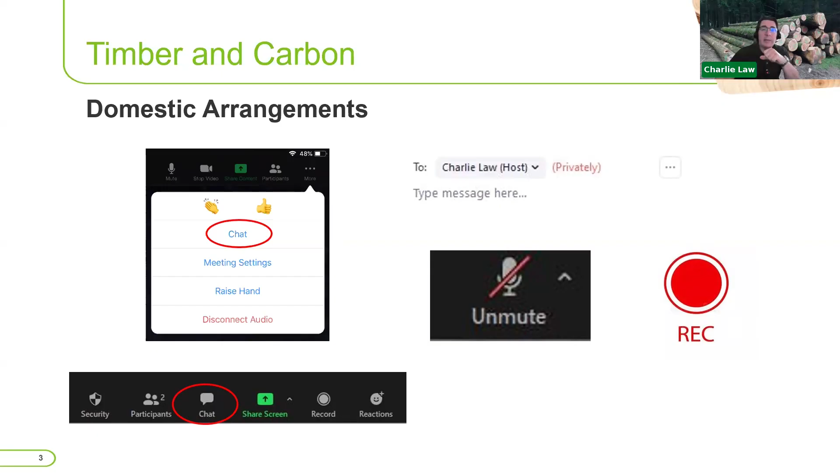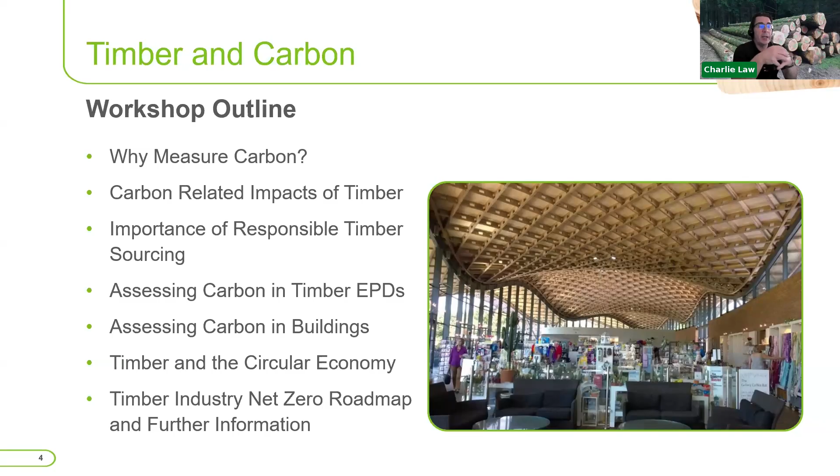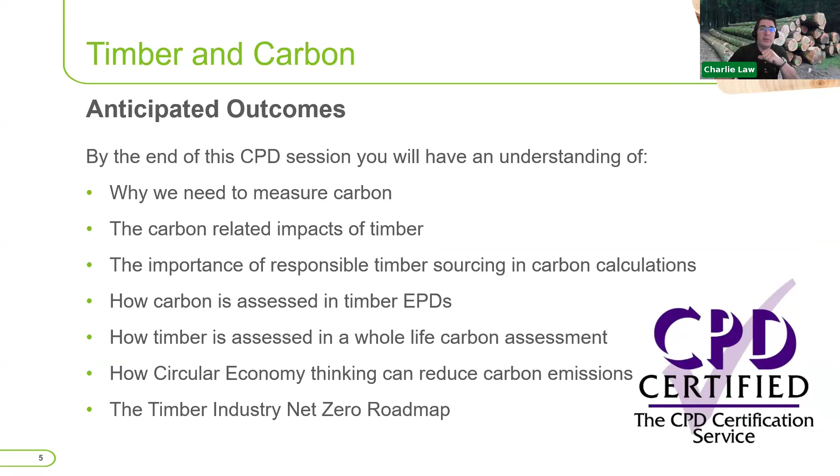Just a bit of an outline on what we're going to be doing today. So we're going to look at why measure carbon, carbon-related impacts for timber, and the importance of responsible sourcing when you're looking at carbon. We're going to be looking at EPDs and whole life building assessments, how you take account of timber within those. We'll look at how you might be able to reduce that carbon by looking at circular economy aspects, and then we'll touch at the end on some of the stuff the timber industry is doing for our net zero roadmap and other information to try and hit net zero targets by 2050. That's the outline to today, and hopefully by the end of that you'll have a much better understanding of all those points. We will be issuing you with a CPD certificate at the end.

We've got a number of targets in place. The Paris Agreement was to limit global warming to well below 2 degrees and preferably to 1.5 on pre-industrial levels, but we're probably hitting that 1.5 degrees near enough now. In the UK, we've set our own legal targets to reach net zero by 2050, set in June 2019, with an interim target to reach 81% reduction by 2035 compared to 1990 levels, announced by the government at COP29 in November 2024.

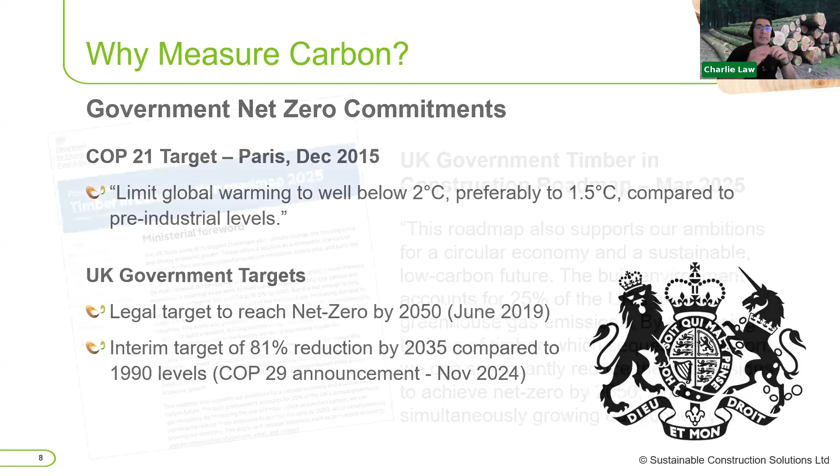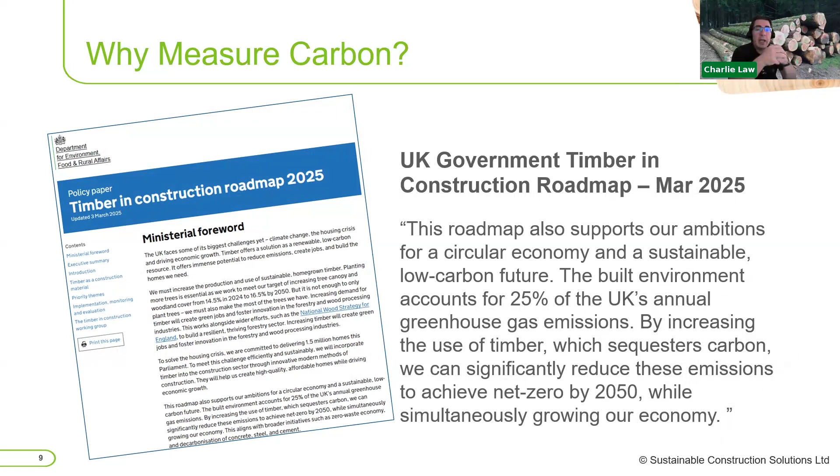Part of the reduction in carbon is also part of the UK government's timber in construction roadmap. I actually chair the working group that's looking at that, and that's looking at the built environment, which accounts for around 25% of the UK's annual greenhouse gas emissions. So by increasing the use of timber and stuff like that, which sequesters carbon, it's hoped that we can significantly reduce emissions to help achieve the 2050 targets while still stimulating economic growth. That's straight out of the roadmap, and a lot of the stuff we're covering today feeds into that net zero roadmap.

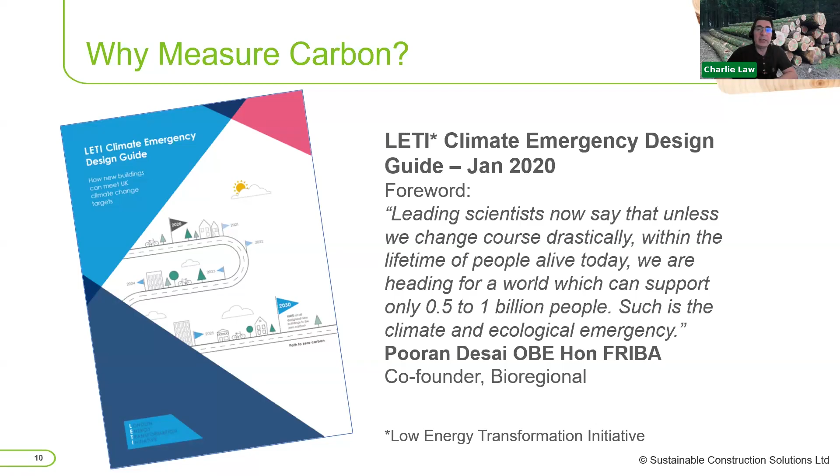But this goes back even further. You've got things like the LETI Climate Emergency Design Guide, saying that we now know that unless we change course drastically within the lifetime of people alive today, we are heading for a world which can support only half to a billion people. Now we're obviously a lot more than that, probably near 8 billion people now, so we really need to be doing something. This is a climate emergency that we need to look at. And there's a lot of stuff around government as well, the Government Climate Change Committee, which advises governments on its carbon plans.

That also states that we should be developing plans to rapidly scale up levels of wood used in construction and support the assessment and benchmarking of whole life carbon in buildings. And that's key where we're coming from today.

That ties in with what we're looking at with Part Z, which is an industry initiative proposed to the government to say, look, we really want you to start measuring the whole life carbon in buildings, because we feel that is one way we can help reach your net zero targets. So Part Z isn't law or legislation at the moment, it's purely a proposal by industry, but it's getting a lot of traction.

Again, that's one of the proposals in the net zero road. The timber in construction roadmap is to consult on that, supposedly by the end of last year, and that hasn't happened yet, which is a shame.

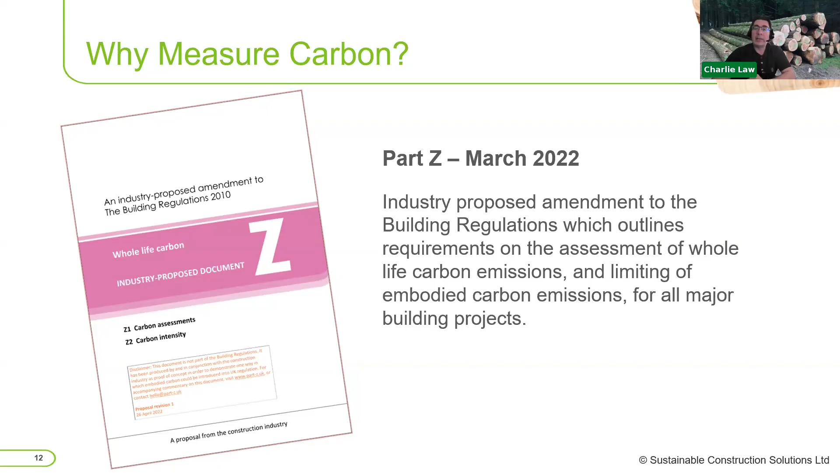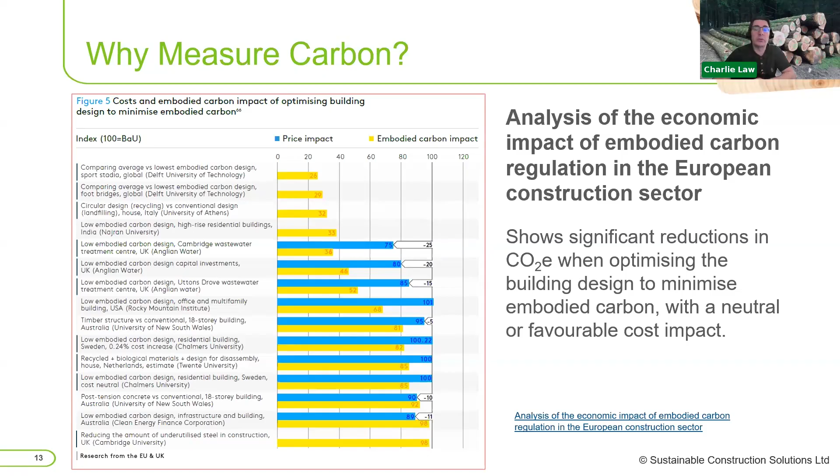So the blue line there is the cost. You can see that some of those had significantly lower costs than a standard building at the same time, if not cost neutral. None on this list were actually above that cost.

So, timber and carbon. Just going back to your old biology lessons, timber, trees sequester and absorb CO2 out of the atmosphere. They emit the oxygen element and store the carbon element as the timber in the timber fibers. So that's what makes up a lot of your timber.

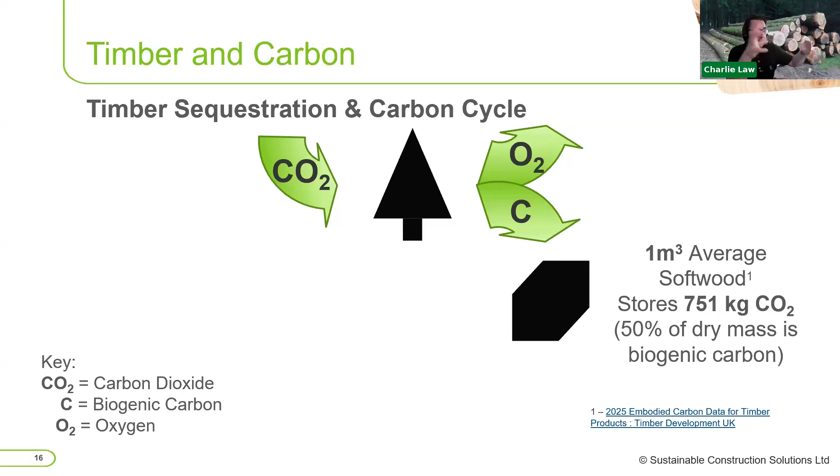50% of the dry mass of a piece of softwood is biogenic carbon, so actually half the mass of the timber is biogenic carbon. So 1 cubic meter of softwood - this is the weighted average across all the timber in the UK - stores on average around 751 kilograms of CO2. And that CO2 stays locked in that product forever until it either decomposes or is burnt.

The only time the CO2 releases is if it decomposes or is burnt as biomass. Even when you're recycling that timber, say you recycle a piece of timber into chipboard, the carbon still remains locked within those fibers within the chipboard.

So that carbon can stay stored in that timber element if we recycle it and reuse those elements forever, unless we burn it. That's why we need to start looking at maybe reducing how much of that timber we burn. And even where we do burn it, a lot of the work going on at the moment around biogenic carbon capture and storage, CCS, or carbon capture, storage and use, is trying to see how we can capture a lot of that carbon out of the atmosphere.

So by the time the timber going into buildings now is maybe coming out and getting burnt, I'd be very hopeful that actually that CO2 doesn't end up in the atmosphere. It stays locked away somewhere, whether that's in a number of different ways that they're looking at at the moment.

Just going back to that timber and construction roadmap, one of the things the UK government is looking to do is increase planting to try and sequester more of that carbon out of the atmosphere within the UK.

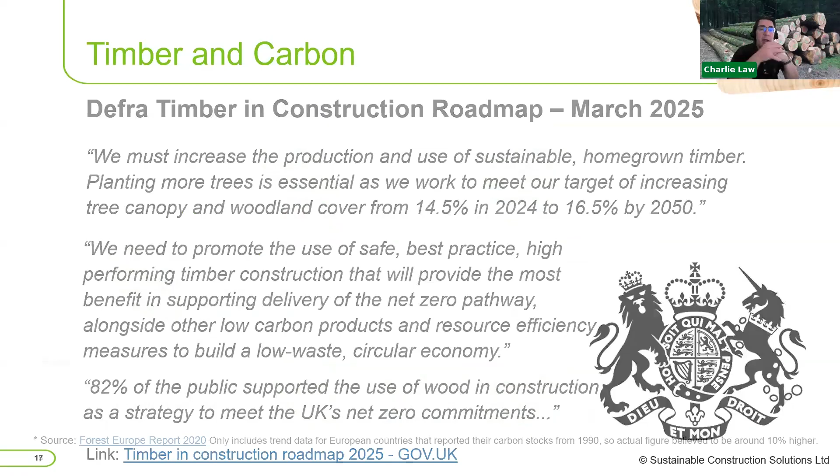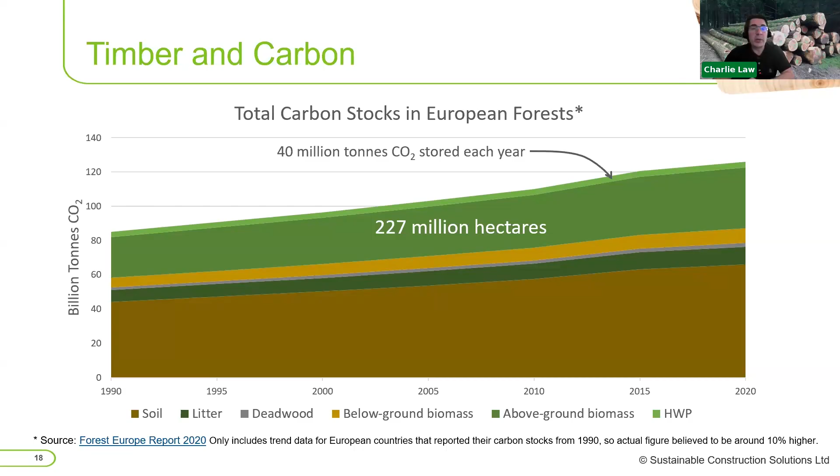For the UK, slightly different figures - there's still a lot stored. Obviously we've got a lot less forest cover in the UK, we're maybe down to 13%, whereas the European average is over 30, 37%.

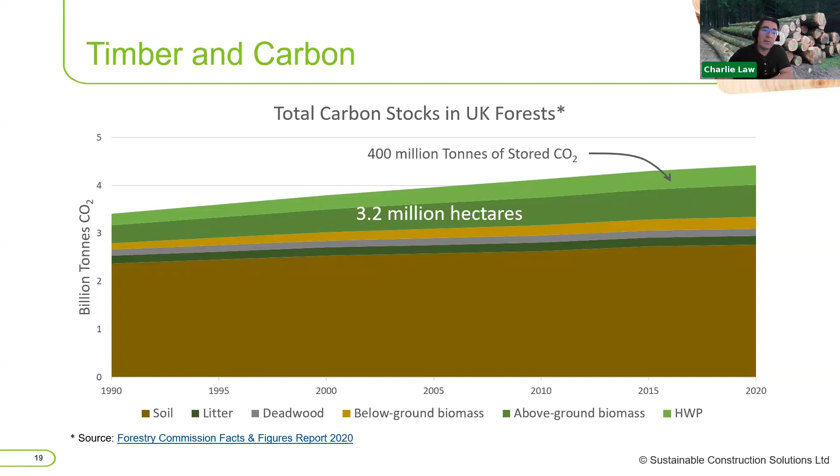But we're still storing sort of 4.5 billion tons of CO2 in our small amount of forest here in the UK. And because we're still using quite a bit of timber, we're storing quite a bit of that in harvested wood products. That light green line at the top is quite thick in the UK because we still use a lot of timber buildings. We estimate it's probably over 400 million tons of CO2 stored in timber buildings at the moment, according to the Forestry Commission.

So just how do we assess that? How do we measure that carbon? How do we know it's there? Well, there's a few, obviously lots of scientific studies have gone over the years, and these have been put into a number of standards.

Two key ones are BS EN 15804 and 15978, which measure carbon in buildings and carbon in products. You've also got ISO 14025, which is the international standard. The EN standard is a European standard, and the 15978 is interpreted in the UK by the RICS whole life carbon assessment for the built environment. So when you're measuring carbon in a building, we should be looking at that RICS product. If you're measuring carbon in a product, you're more likely to be looking in Europe at that EN 15804. And there are obviously other documents behind that relating to timber and how we measure certain elements.

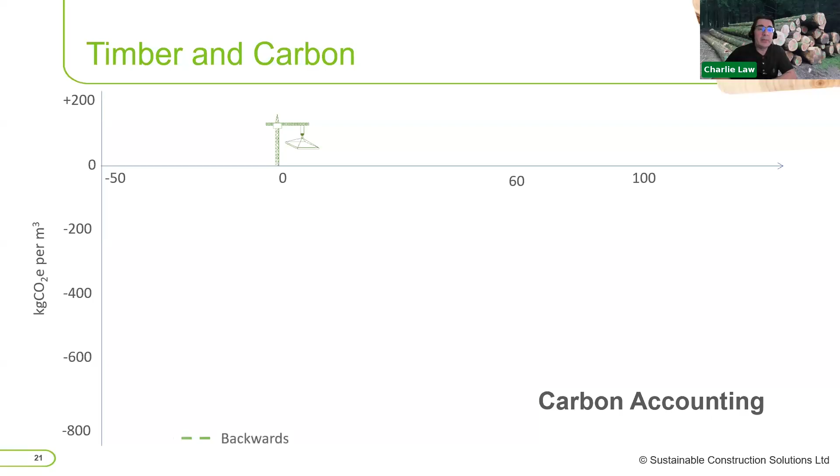Now, the way carbon is accounted for, both in products but particularly in buildings - if we look at a building example here, the way the tree, the timber works: the tree grows, and a typical piece of softwood coming from Europe or the UK might on average be around 50 years old. So if we go back 50 years, that tree has been sequestering carbon out of the atmosphere over that 50-year period. By the time it's felled and used in a building - we say year zero there - it has sequestered 750 kilograms of CO2.

Now, there's obviously an upfront impact where we're processing the timber, harvesting it, transporting it to the sawmill, etc. So there's a figure that reduces that amount, probably around 50 kilograms of CO2 in that upfront impact. So the remainder - you're looking at around 700 kilograms of carbon still stored in that piece of timber for the duration of its use.

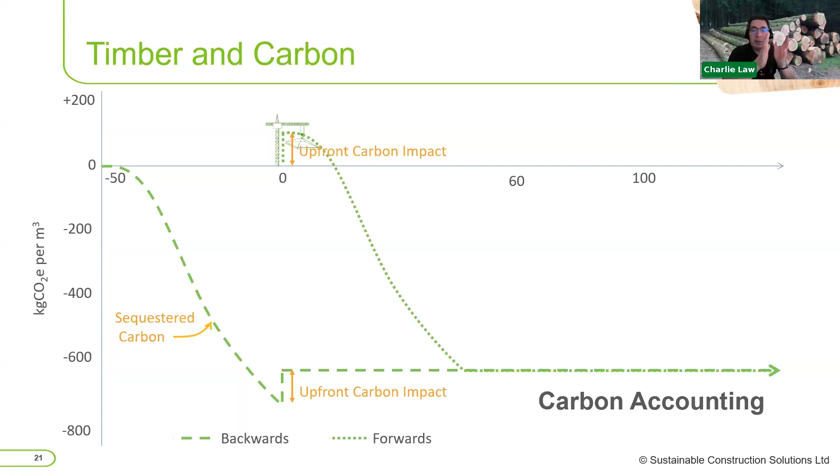And the standards generally, there's a couple of ways of looking at it. There's an alternative view where we should take that carbon at year zero and discount it over the life of the building, say about 50 years. I can understand why some people say that, because we need to try and make sure the building stays up for as long as possible. But in pure accounting terms, there is this missing carbon gap, because the carbon has been taken out of the atmosphere, but if you're not accounting for it for 50 years, there's a gap in that carbon accounting. So the standards don't look at it that way.

The standards very much look at it in the backwards-looking approach, where they take that carbon at year zero, allowing for the upfront impact. But what they do is set a limit of 60 years. After that 60 years, you need to account for the timber coming out of the building and the impacts of that. Because you've accounted for the sequestered carbon upfront, you need to add that back in at end of life. So that's why you end up adding back in that 750 kilograms of carbon, plus a little bit more for transporting off-site, demolition, processing, etc.

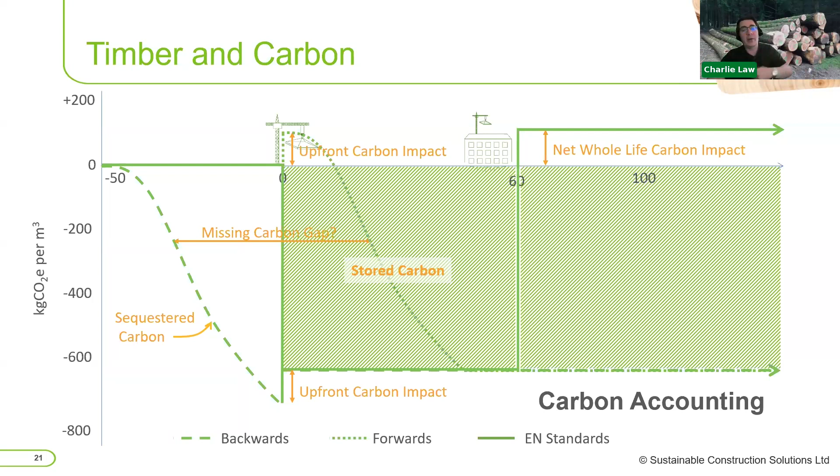But during that time, you've got that stored carbon. If we do keep that in the building - the standards have set it at 60 years - but if you can keep that timber in the building for 100, 120, 150, 200 years... there's a door in Westminster Abbey that's 1,000 years old. If we can keep that in there, that's locking that carbon up forever. So that's just how the standards approach it. One of the key things in the standards is it talks about responsible sourcing of timber.

In EN 15804, the definition of sustainably managed forest is key. It says sustainably managed and certified forests are any forests operating under an established certification scheme for sustainable forest management. Examples would include FSC, PEFC, and UKWAS, which is the UK Woodland Assurance Standard, and Grown in Britain as well. That gets picked up within that sustainably managed forest definition.

You can also include non-native forests or short-term managed forests, so things like the UK Forestry Standard would pick that up, along with some other areas that don't really apply to the UK anyway. The two main ones are the top two, but the main one being, let's say, PEFC certification.

PEFC certification would allow you to take account of the sequestered carbon up front. If you don't have that guarantee that the timber has come from a sustainable source, you won't be able to include that sequestered carbon up front, but you still have to include the impact of end of life, which means that timber building would be very carbon inefficient. The reason they're asking for this is that there have been issues in the past, and still are, of deforestation in certain parts of the world.

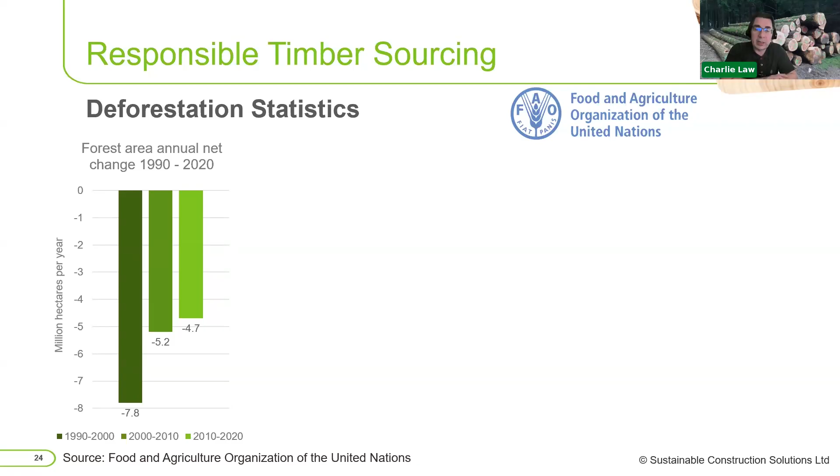These are the latest figures from the UN Food and Agriculture Organization up to 2020. Hopefully they do these every 5 years, so we should see data sometime this year going up to 2025. You can see we were really bad back in the 1990s, losing about 7.8 million hectares a year of forest. That has slowed, we're now down to 4.7 million hectares, but that's still a net forest loss. That means less carbon being taken out of the atmosphere across the globe, which isn't good, because we're emitting even more, and there's less forest and other natural resources enabling that carbon to be taken out of the atmosphere.

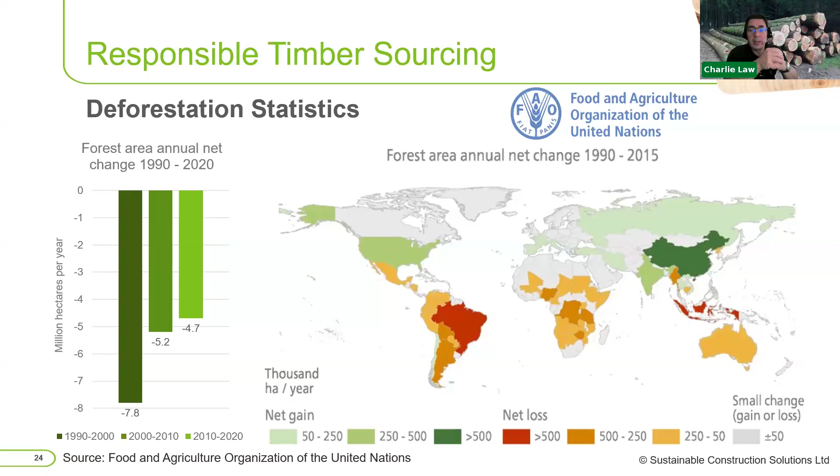So we do need to be really careful where we get our timber from, and make sure we ask questions around certification to ensure it's responsibly sourced. Brazil was losing over 500 thousand hectares, about 3.5 football pitches every minute at one point. It has slowed slightly, but we're still losing a lot, so we really need to be asking those questions.

Just to look at what we buy, these are the latest figures, the 2024 UK timber consumption. The 2025 figures won't be out until probably near September this year, so these are the latest figures we have. You can see we consumed around 15 million cubic meters of timber in the UK, a vast majority from softwood products, so that's sawn timber or particle boards, OSBs, fibre boards, and MDF. All those are made out of that softwood product.

A small amount of sawn hardwood, just under 500,000 cubic meters, and quite a bit of plywood, just over 1 million cubic meters, the majority of which is hardwood ply. Then a growing amount of engineered timber, so that's CLT, glulam, and a big proportion of that is actually I-joists, so things like engineered timber joists are a big proportion of that engineered timber.

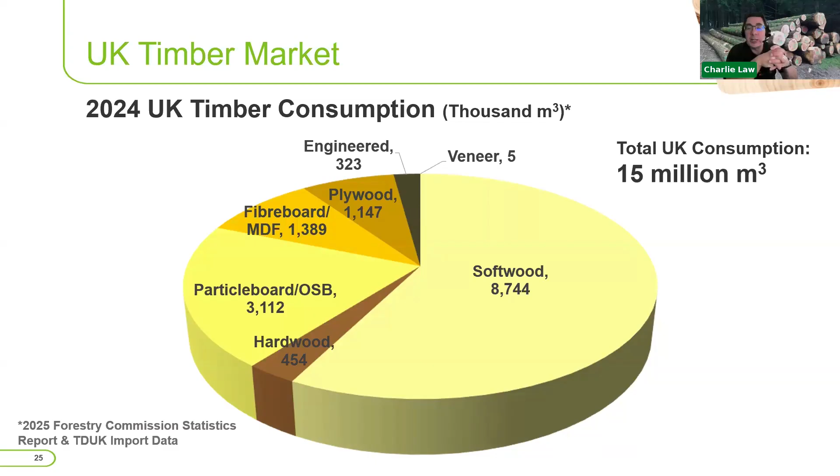Things like plywoods and stuff like that, let's say it's not always responsibly sourced. We know there are some issues with certain places, but timber generally is a fantastic resource. It's renewable, and if it's managed in the right way, it's a good resource to use.

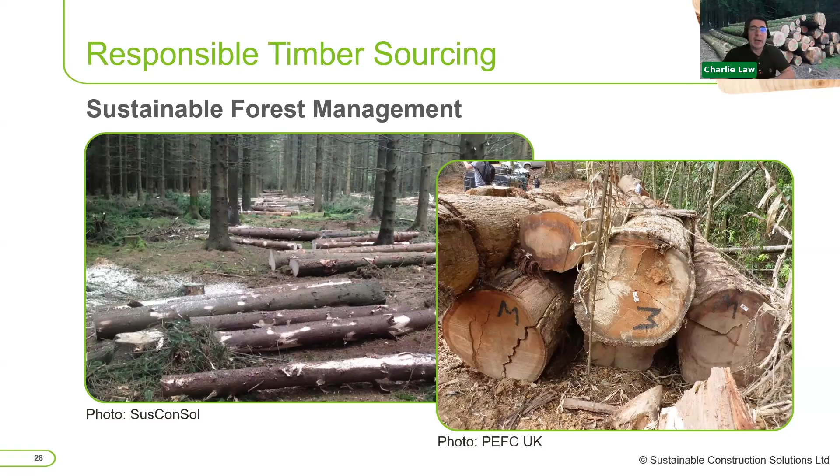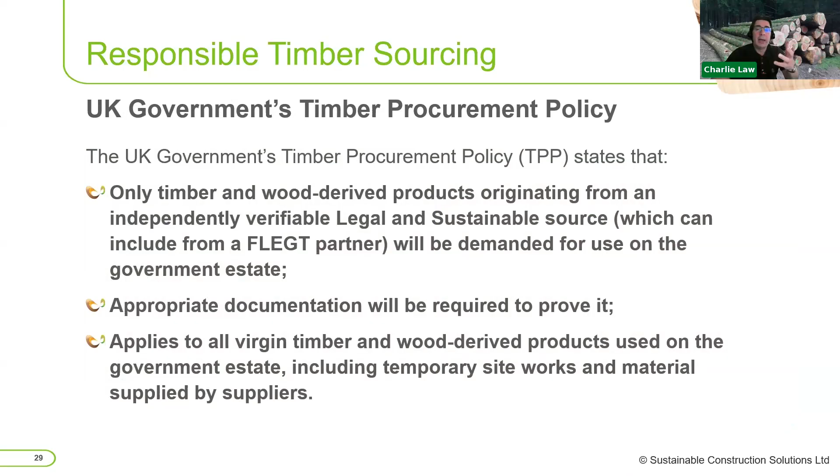So make sure we're using sustainably managed forests. These are some examples from the UK and Malaysia there, and obviously that's all picked up in the government's timber procurement policy, where they require sustainable timber and reference the three main schemes we talked about earlier on.

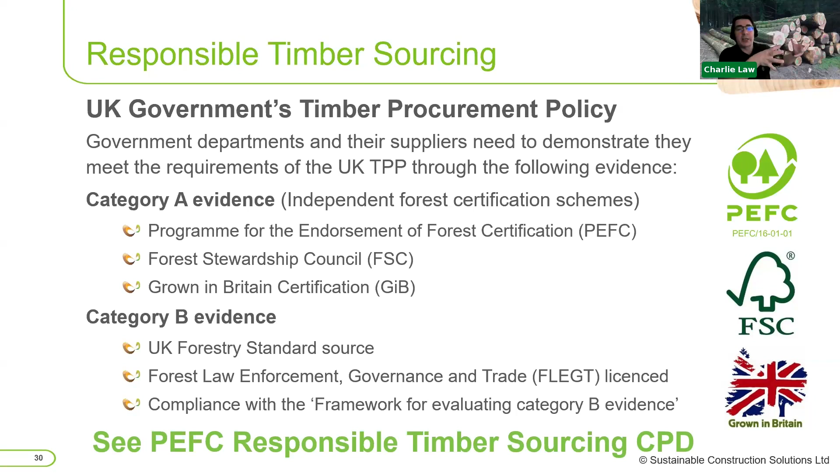PEFC, FSC, and Grown in Britain are the three certification schemes that the government recognises as being sustainably sourced. If you want more information on how that works, there's another CPD on responsible sourcing which goes into detail on chain of custody and stuff like that, so you can find more information there.

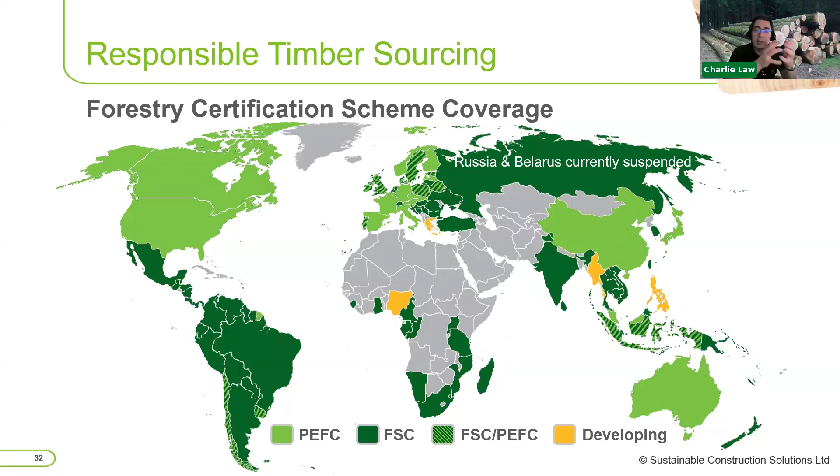When you look at where your timber is actually coming from, most of it comes from Europe, and that PEFC area is very strong there. It's only really the UK and Sweden that focus on FSC timber. So if your timber's coming from Europe, it's more likely than not to be PEFC certified. Likewise, if you're getting stuff from the US or Canada, that's also going to be PEFC. It's more the higher risk nations where FSC dominates - South America, Sub-Saharan Africa, and the Far East. So just bear that in mind.

Moving on, how do we assess that carbon? We've now made sure our timber is sustainable, so we can take that into account within our assessment methods. When we look at a timber EPD, for example, it's split into a number of sections. There's what we call the upfront stage: A1 to 3 is the product stage, and A4 and 5 are the construction stage. So this is our upfront carbon emissions in effect.

This covers raw material extraction, transporting the raw material to its production site, usually a sawmill, which is A3, the manufacturing bit. But there are bits in between - if you're remanufacturing, there'd be more transport and production involved if you're making it into an engineered product, for example. Once you've got the finished product, you're transporting that to the construction site, and there's an element of carbon emissions to put that piece into place on site. That's what we call our upfront emissions.

You've then got the use stage - is there any energy used for using the product? Timber obviously doesn't need plugging in, so there's no carbon emissions associated with that, which is more where B1 comes in. Maintenance, repair, refurbishment, and replacement come into it when doing a whole life carbon assessment. So if you use a short life product, for example an untreated softwood as cladding on the side of a building, that won't last 60 years, so you're required to show that it will have to be replaced within that 60-year cycle. That would come into your assessment in that situation.

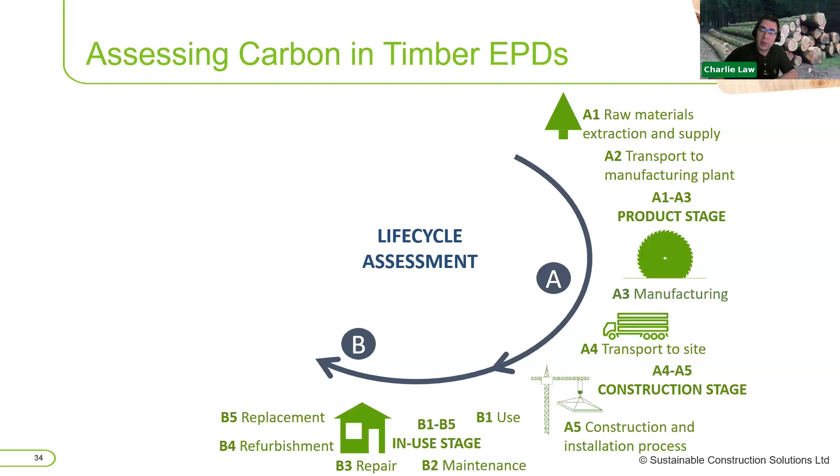Then you've got any operational energy and water used by that piece of kit, which doesn't really apply to timber, as we said. And then you've got the end of life emissions - demolition or deconstruction, transporting it off-site, and any processing. If it's a waste product, even if it's reused, it might need some processing or disposal. That disposal is very much landfill we're talking about here, because if it's burnt for energy, that comes under waste processing - it's classed as a recycled product and then goes into the energy sector as a product.

Within the EPD, you also have to take account of beyond the end of life cycle. These figures don't form part of the overall impact of the product in the EPD, but they do show how that product could be reused at end of life. For example, is there a benefit of using recycled timber in a panel board because you've got lower emissions from that versus virgin timber, since you're not felling a tree, only processing the recycled material? Or if you're burning it, you haven't had to use virgin materials or another form of fuel. So there are those sorts of benefits taken into account, but it doesn't form part of the main emissions in the EPD.

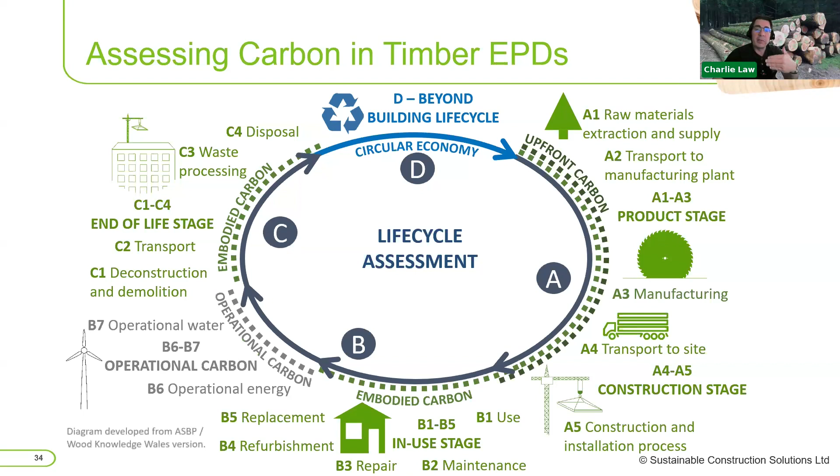As mentioned, embodied emissions are seen as A1 to 5, B1 to 5, and C1 to 4. Operational emissions are the B6 and 7. And as we mentioned, you've got the upfront emissions, which you might have heard called your A1 to 5 emissions.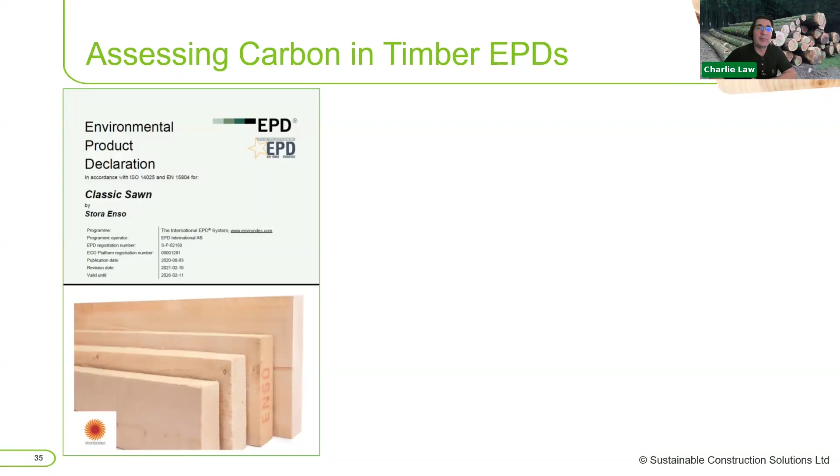So when you look at an EPD, this is a good example from Stora Enso, although they have updated it and it's not as good now, the latest one. This is the older one, but it's very clear, so that's why I still use it.

What you're seeing there is a figure somewhere that talks about the biogenic carbon stored in the product. If there's a lot of packaging, over 5% biogenic carbon in the packaging, you need to report that separately. Timber rarely has packaging over that 5%. You can see the biogenic carbon of this particular product is 733 kilograms, slightly lower than our average of 751. But underneath you can see how that's made up.

You've got the fossil, the biogenic, and the land use and land use change or transformation figure. The key figure for impact is generally your fossil carbon - that's where your highest impact is going to be. Your biogenic carbon there, you'll see that sort of 7.33 to the power of plus 2, meaning it's 733 kilograms of biogenic carbon stored in that product. That's how you read the EPD.

A lot of that's down to A1, which we talked about earlier. Your raw material extraction on average is around 12 kilograms - it's quite low. It's in that A1 section that you allow for that biogenic stored carbon. So in this example, the 733, you've then got transportation from the forest to the manufacturing plant, on average around 17 kilograms per cubic meter. Then you've got the processing in the factory, around 6 kilograms of carbon.

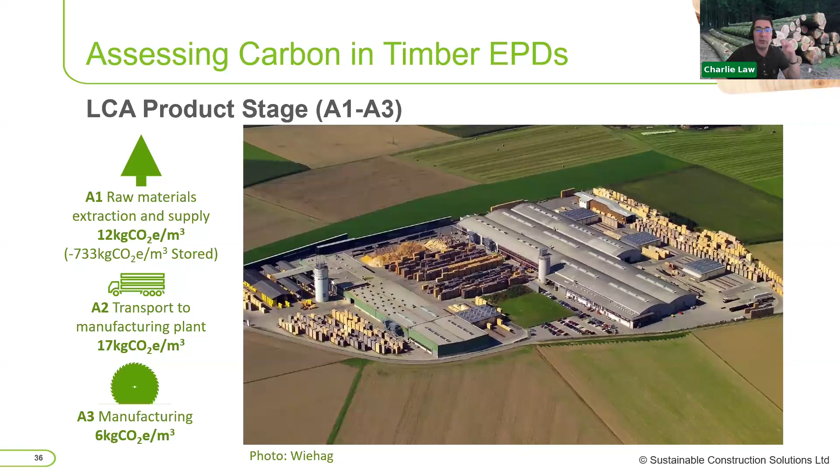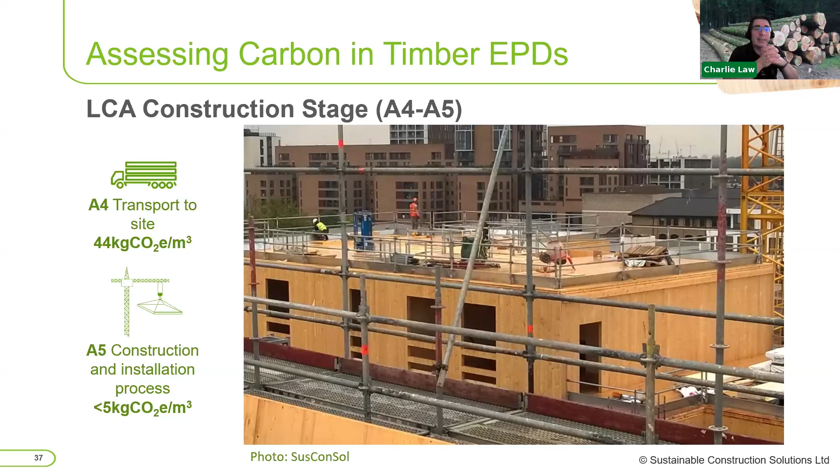You then transport to site. They're quite high emissions for some timbers, because a lot of this timber we're bringing in from Europe, for example Scandinavia, Germany, Poland, depending on the material you're talking about, so they can be quite high emissions per cubic meter of material. But on site, fairly low emissions to put that into place, generally less than 5 kilograms. It's a little bit difficult to get that data because that's coming out of the construction sites themselves.

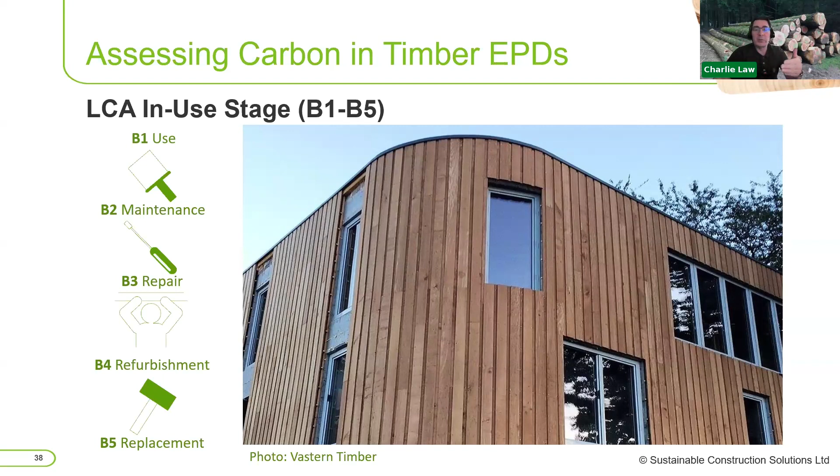As far as in-use, as long as you design the building to last that 60 years - for example, this one's got cladding, that's brimstone, that will last 60 years - you shouldn't have any in-use emissions. But again, if you don't use a product that's going to last the life of the building, you might need to take account of some of that.

End-of-life emissions are generally fairly small. So deconstruction is generally less than a kilo, less than 0.1 of a kilo in many cases. There's some transport off-site, generally less than a couple of kilos to get it to a processing facility. And then C3, you've probably got the processing emissions in there, which can be high - 6 kilograms on average, but I think that's a bit higher. In a lot of cases we're seeing that being a lot lower now.

That's where you would add back in - we talked about adding back in the sequestered carbon. That would go back in so that stored carbon can be transferred to the next product cycle. So, for example, if it's getting transferred from solid timber into chipboard, the chipboard can then take account of that 733 kilograms of carbon. That's why we do it, so it's transferred.

Ideally, in the EPD, you should see figures for reuse, recycling, biomass, and landfill. Landfill is very unlikely - you very much don't see that. A lot of EPDs, though, will take a mix, and it will be based on the country of production. So if you're looking at an EPD from Germany, the figures for C1 to C4 are unlikely to be representative of the UK, so you can't really take that into account. We are actually looking to see if we can include some C1 to C4 figures for the UK going forward.

So they should be in the latest data. We're just running that past our verifiers at the moment to make sure they're happy with that. So bear that in mind, don't use the EPD figures C1 to C4.

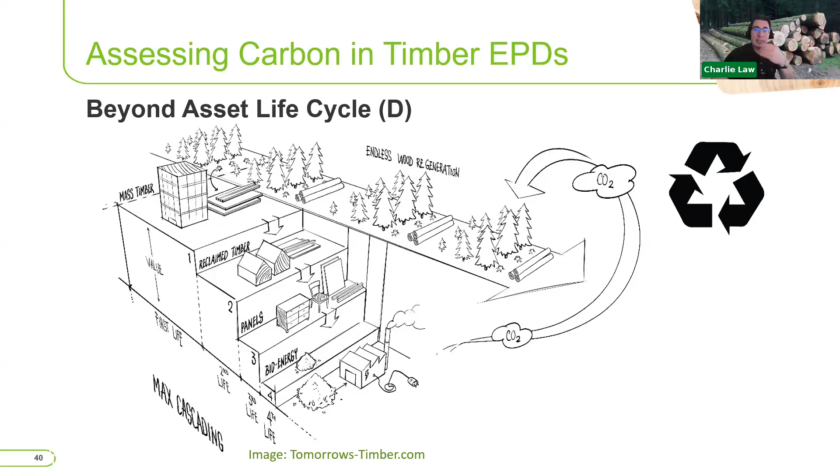And as a last resort, we should be looking at using that timber for energy production. So that should be a last resort. At the moment, unfortunately, all too often that's seen as the first line of defence, and we're burning too much timber. Probably about two thirds of the timber that goes to waste is actually going straight for energy recovery, and we need to change that over the years.

So in building, we've talked about the carbon for an EPD. In buildings, the process is exactly the same. We've got the same processes there: the upfront carbon, the A1 to A3. We just put all of those elements for all the different elements from the EPD into that whole life carbon assessment for the building, and obviously with the quantities of that particular material.

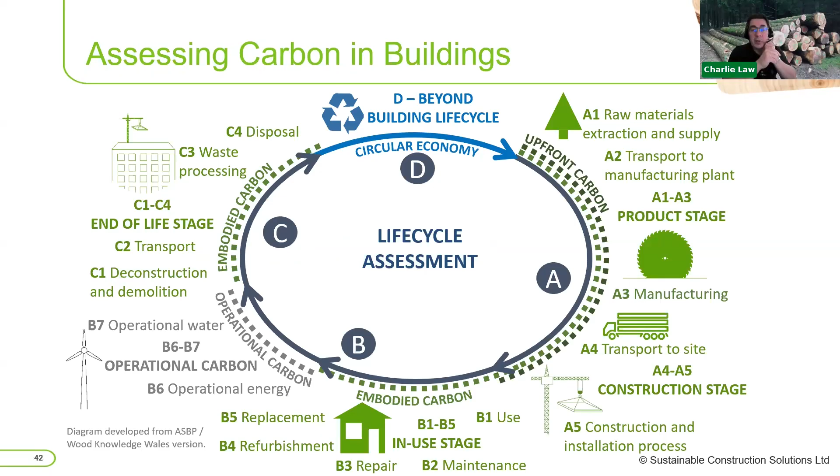When you carry out a whole life carbon assessment, so that's A1 to 5, B1 to 7, C1 to 4, and D of a building, then you can include in effect that negative figure that you'd usually get with timber in A1. So you'd be able to include that whole figure in there, which includes let's say a 751 plus the fossil carbon, so it'd be lower than 751. It'd probably be around 700 minus 700, something like that for a piece of softwood, because you're adding back in that 751 at C3, so they balance themselves out.

When you're doing an upfront assessment, you're not allowed to include that total figure, so you're not allowed to include the biogenic carbon in A1. So what you have to do is you state in effect just the figure excluding the biogenic carbon element, and I'll show you some figures for that in a minute. And then you state that biogenic stored carbon separately. Like we said, just a reminder, all timber must be from a sustainable source to be able to do that.

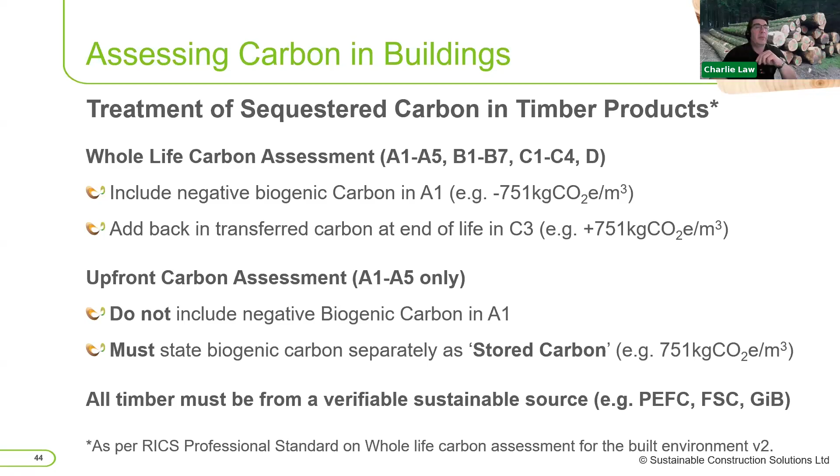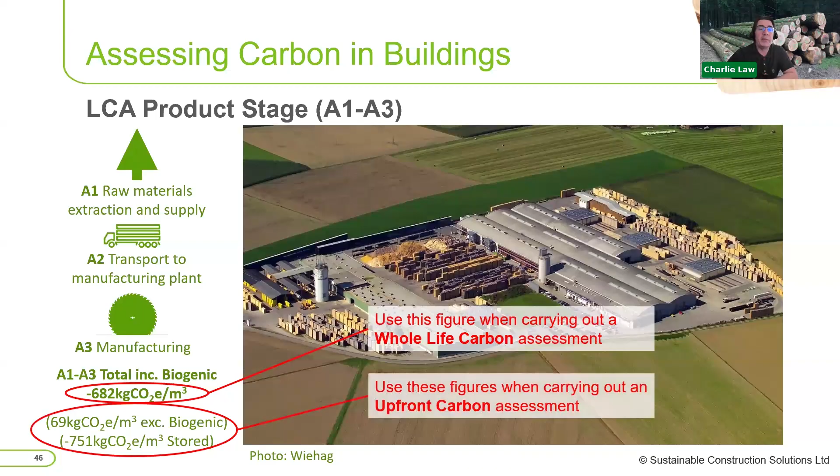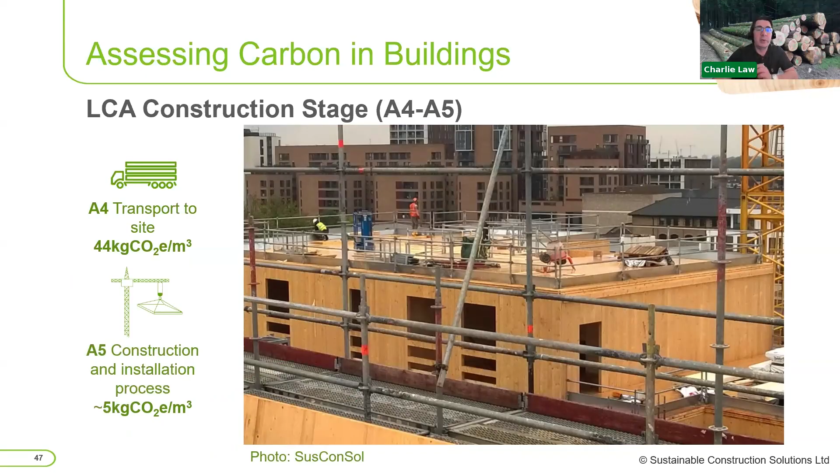Your transport to site on average is around 44, and you'd have to measure your A5 emissions, which are probably circa around 5 kilograms of CO2 per cubic meter. But that's really something you need to measure on site with your contractor.

In the use stage, as we said, you shouldn't have any impact there if you design the timber to last the 60-year life of the building.

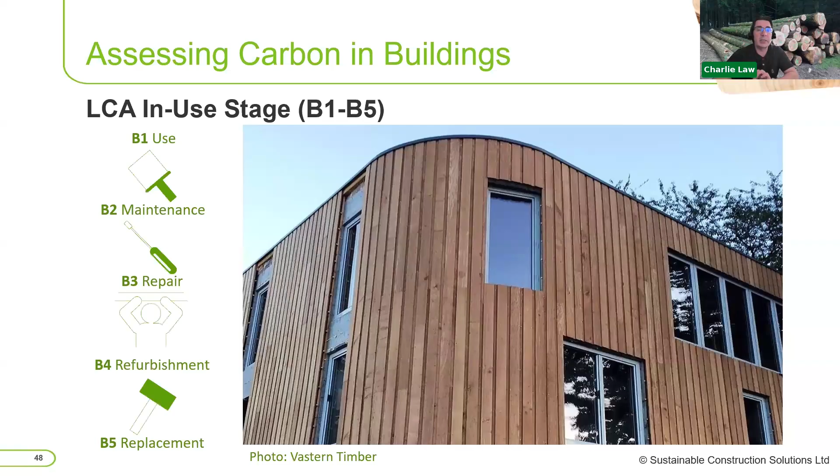If you want to go into a bit more detail, we have got some papers in TDUK which give you a bit more of a split based on the product, if you want to use that.

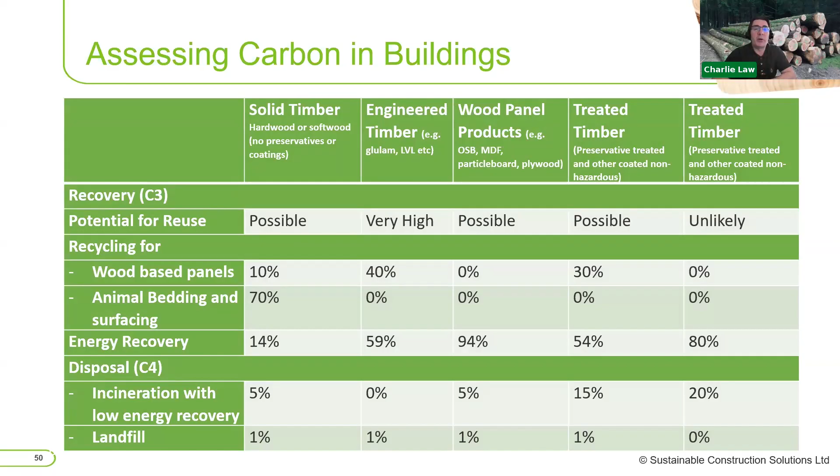So timber and the circular economy - how can we reduce that amount of carbon in the building? Circular economy is the best way to look at that. How can we maintain the building, make sure its products are reused, remanufactured, redistributed, with cascading recycling?

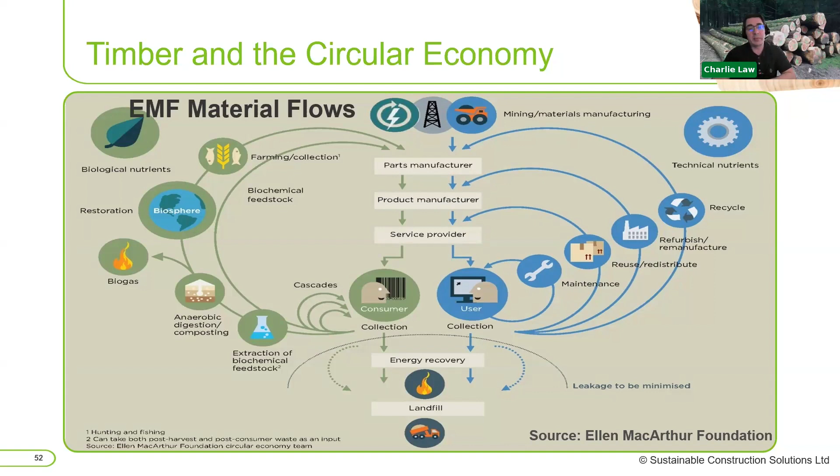So you may have seen this map - this is what we call the butterfly diagram from the Ellen MacArthur Foundation, which explains it. The whole point is to try and keep your product within these inner circles as best as possible and avoid leakage into energy recovery and landfill.

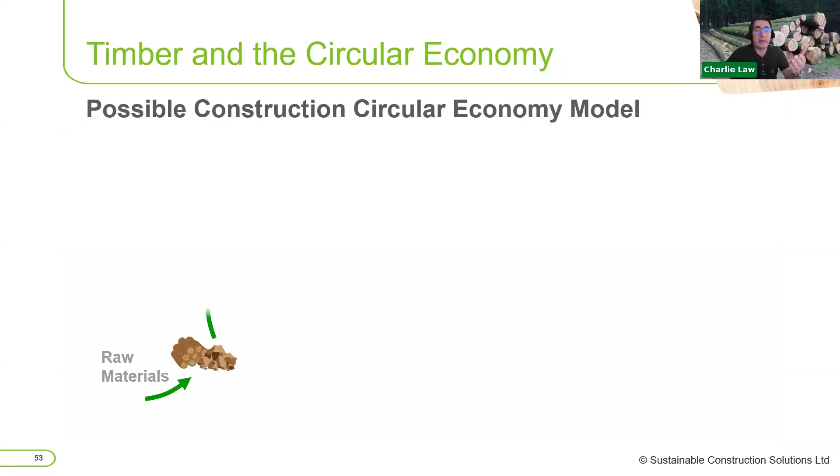A possible construction circular model might look like this. We've got our raw materials coming in. We want to try and avoid those fossil-based materials like plastics wherever possible. We want to look at our production and turn that into renewable energy use. We need to look at our business models.

Construction, for buildings, has very much been on a sale model - you pay for all the materials. But could we start looking at lease models for the actual products within the building, in the same way that we hire plant to build the construction site in the first place? We don't buy a piece of plant generally, use it to build the building and then throw it away - we generally hire it and reuse it in a number of different places. We could do that with materials.

Obviously we've got installation, and any waste from those processes should feed back into the system. And then we need to make sure that the installed product is used correctly, maintained to keep it in use for as long as possible.

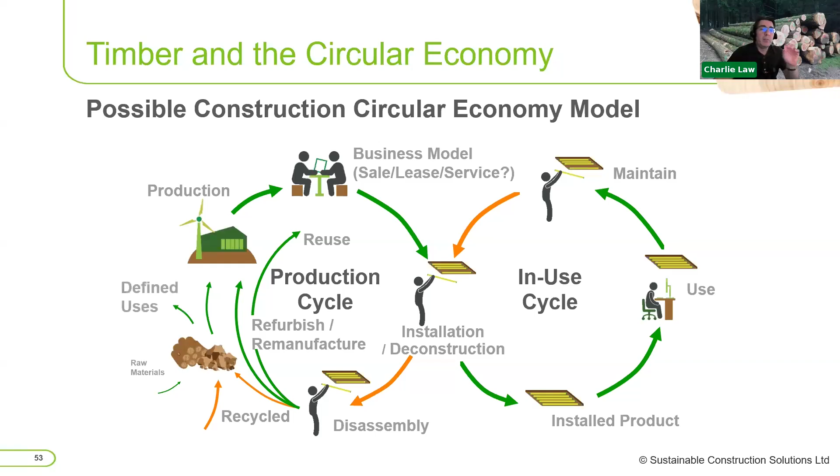And only when it comes to the end of its useful life is it disassembled - preferably for reuse somewhere else, remanufacture, or reuse of the individual components, recycling them to reduce the need for more raw materials. And if we can't reuse that material in the production cycle, make sure there is a defined use for it elsewhere. Timber is fairly circular anyway.

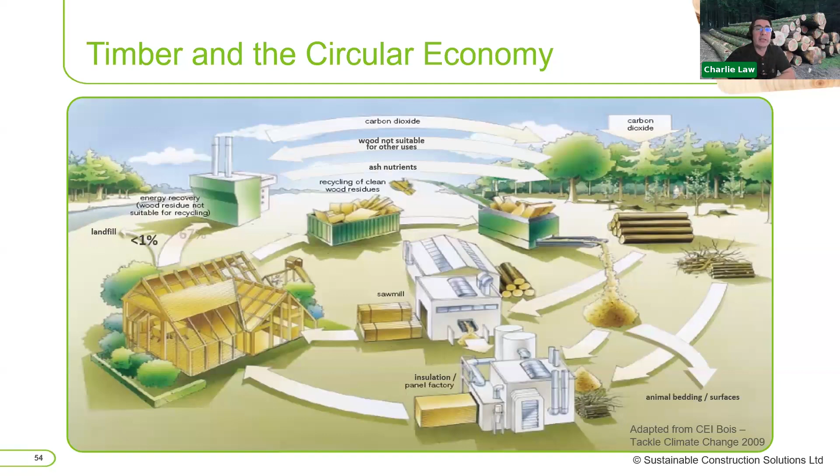We mentioned this earlier on - we've got the figures here that less than 1% goes to landfill. We do need to reduce that amount going into biomass, but what we don't know about is what's being reused and remanufactured at the moment. So we do need to have a little look at that.

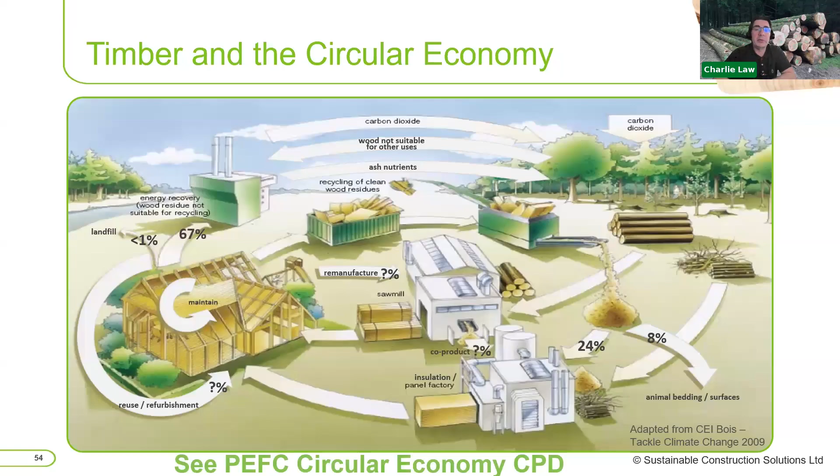And if you want more information on timber and the circular economy, we do have another CPD on that.

But what we should be looking at is redesigning for reduced carbon. So do you actually need a new building? Could we make sure we assess that embodied carbon early to maximise the reduction opportunities, optimise the building form and layout to simplify the design, incorporate circular economy thinking to ensure maximum reuse of products and reuse existing materials from other construction sites, maybe on your project in your building.

Review the embodied carbon of different structural solutions. So would timber work better than steel in a lot of cases? Consider the benefits of carbon storage within the building. Obviously that's a big benefit, even though it's not necessarily highlighted in some of the assessments, but it's a big benefit because it's keeping carbon out of the atmosphere.

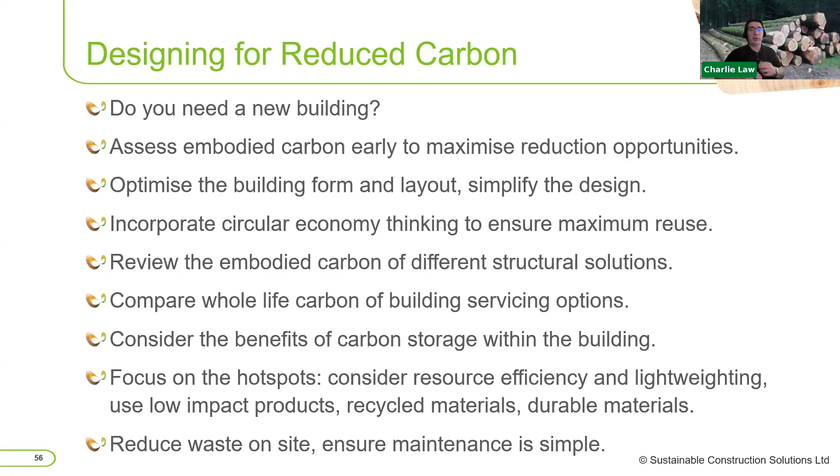And then look at your hotspots and don't forget about reducing the waste. So I've got a few examples here of things you might be able to do.

This is the Alliander HQ in the Netherlands, a 23,000 square meter workplace and workshops with storage, built in the 70s, early 80s, in concrete. The client said they wanted to demolish this and start again, but the architect went in and said, no, I think we can reuse a lot of these components to reduce carbon and build more of a circular economy.

So they re-insulated all those existing concrete buildings, put in effect a new skin on the outside, which was insulated and clad with timber. This was the artist's impression they gave the client of what it would look like on the inside, using pallets. Obviously they're not subject to the weathering - they're durable timber on the outside cladding.

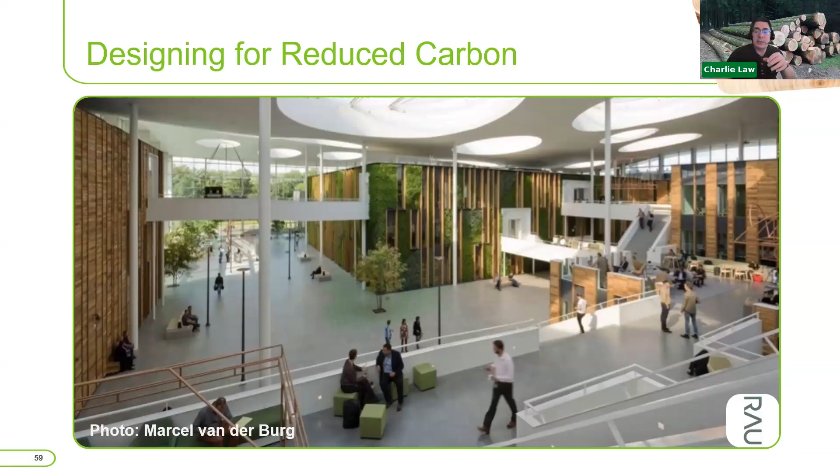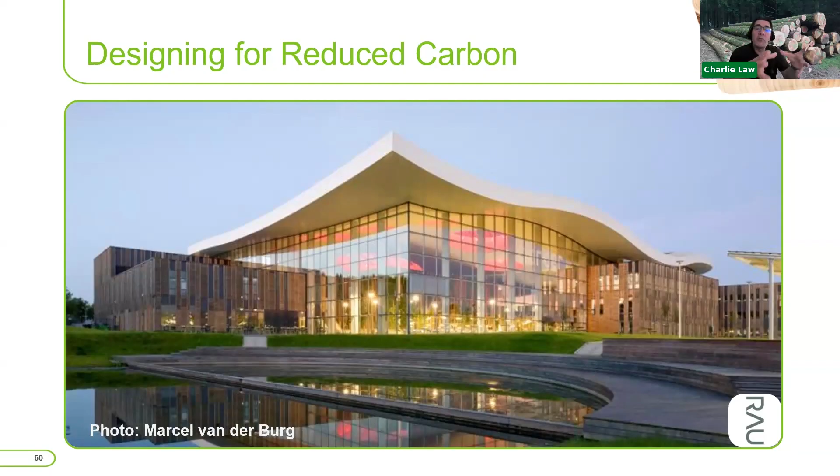And this is actually the final building, the completed building. Those timber bits you can see jutting out from the atrium there are those concrete buildings that have been reclad in durable timber.

Another example of building on top is the Technique Building. The original building - if you look at this elevation, that cornice line there was the original building. So there's another 3 stories being added on top using timber, with no impact or very little impact on the foundations required. There was no underpinning or anything like that required on this building, because the lightweight timber structure - the existing structure could hold that lightweight timber frame.

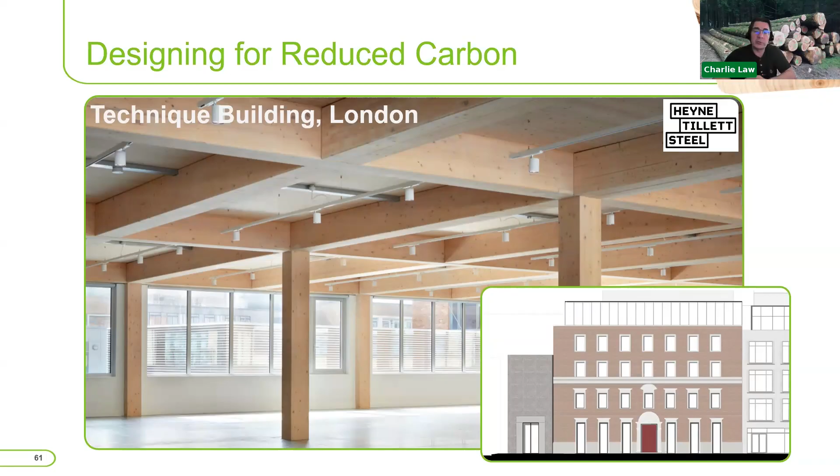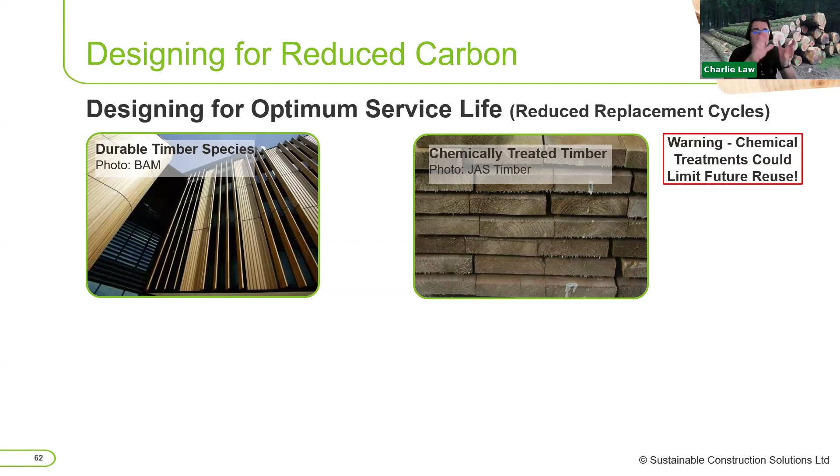We need to look at things like designing for optimal service life. So, using durable timber species on the outside of buildings. Where you're using timber on the inside of buildings, make sure you use things like chemically treated timber to prevent against insect attack. Just be careful that some chemical treatments could limit future reuse, but that's just something we'll have to accept - unfortunately there's no alternatives for some of that at the moment.

For the external building, though, you can use things like thermally modified timber. This is timber that's been modified by adding heat and steam, which changes a non-durable timber into something that will last a lot longer. I think they're testing that to 50 years plus at the moment within the brimstone product, for example, or chemically modified - so this is in effect Accoya, an example of that, where it's actually in effect pickled. They use acetic acid, which is in effect a vinegar, industrial vinegar, to pickle the timber.

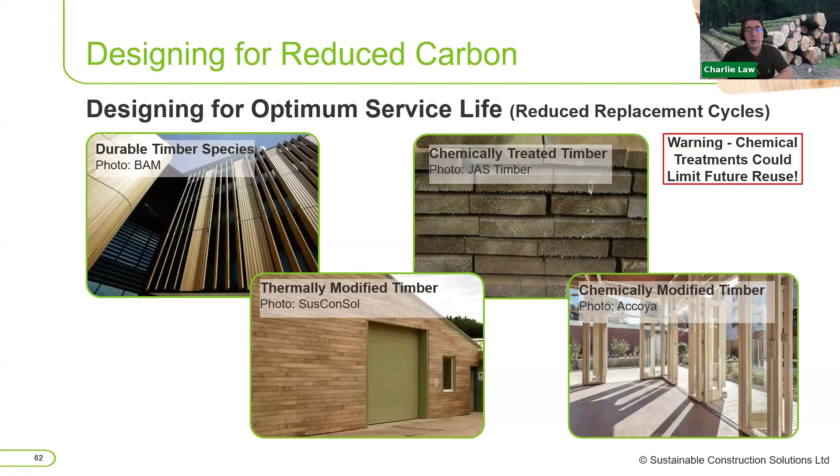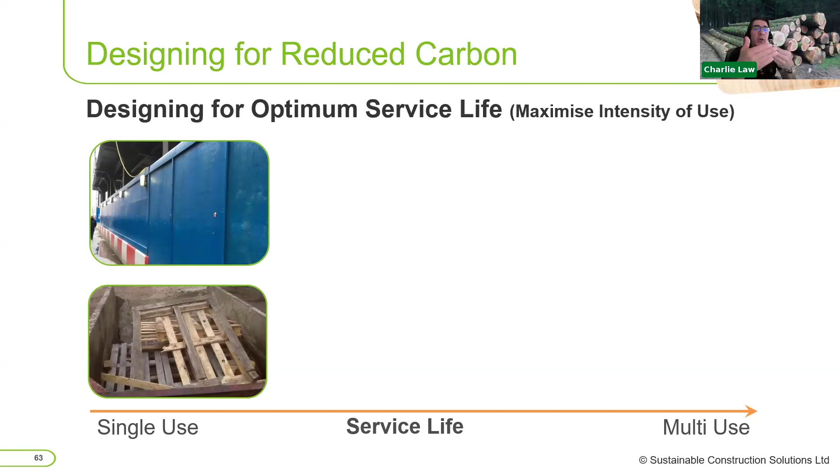So all of those will make that timber last longer in external environments if that's where you need to look at it. But also look at designing for optimum service life, and not necessarily just designers around the table, but contractors too. Look at your hoardings - could you use a reusable hoarding system like Hoardit rather than putting a new hoarding up on every site? These are reusable panels, they're still plywood.

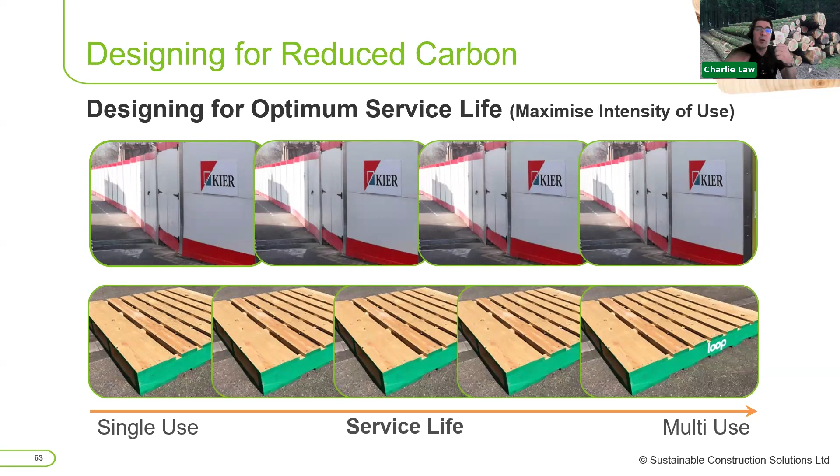They're just a good grade of plywood that's had all the edges sealed and everything else, and you don't fix those - they're clamped into place so there's no holes for the moisture to get into. So that's something you can use, or reusable pallets. The loop system that's around at the moment that British Gypsum and others are using, which means they're returnable pallets rather than single use. Design for ease of maintenance - do you have to finish the building?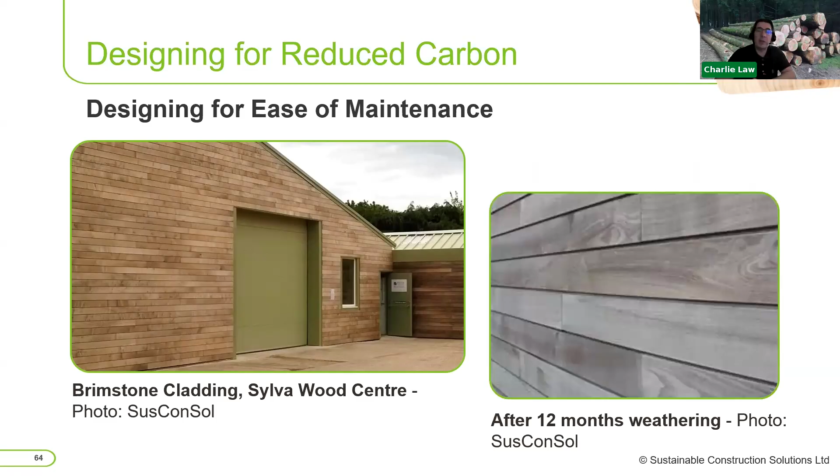This is going back to that brimstone cladding in the previous photo. This is a cladding system, thermally modified cladding - you don't need to coat it. It doesn't need a coating, and it will silver off to a silver grey finish after around 12 months. And that will last, like I say, for 50, 60 years without any treatments.

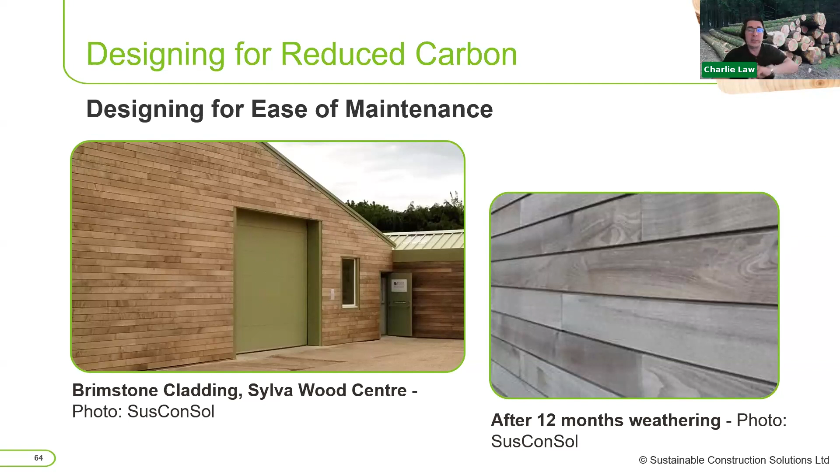You don't have to then put someone up there to maintain the building, which is additional carbon impacts. Make sure we design these buildings for flexibility, deconstruction, and disassembly. Something that we're doing with my TDUK hat on.

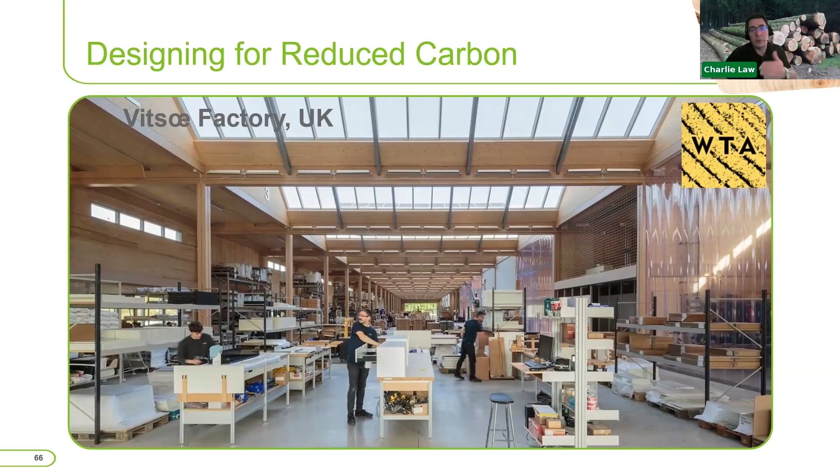And that's been done. This is an example of the Vitsœ factory where these elements here, all these beams, for example, can be taken in and out, and they can add additional floor areas, storage areas, or if it's a high bay workshop or storage area, and they're just on those Sherpa connections that we mentioned earlier on.

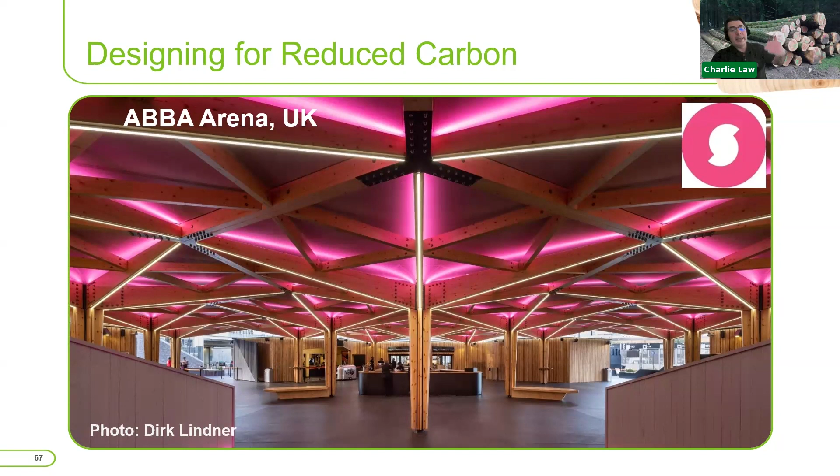And the ABBA arena, if you've seen the ABBA show in London, that whole building that you was in is demountable and can be put into 20-foot shipping containers and shipped anywhere around the world.

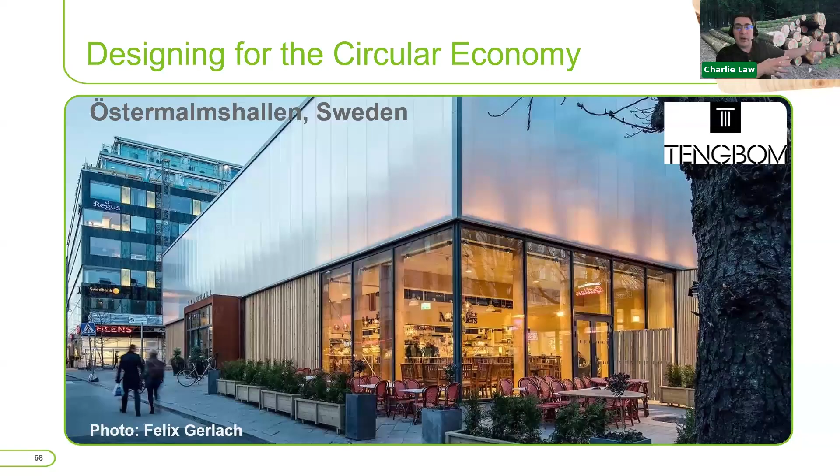So lots of examples. This one was Östermalm in Sweden, a temporary market hall. They were refurbishing the market hall in this town, put up this temporary building to house the stallholders for about 18 months. Then that was taken down and shipped 500 kilometers southwest and converted into a sports hall. So there's those sorts of things that we need to be thinking about.

So just to finish off, we're just going to go on a couple of other bits of information. If you've got any questions at the end of this, please put them in the chat. I haven't seen any come up at the moment, so we'll have about 5 minutes for questions at the end. But just to go through a few bits that the timber industry is doing.

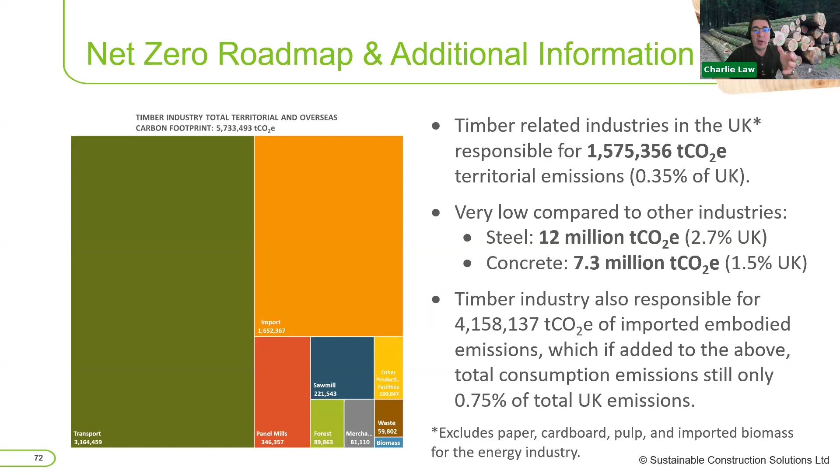But it's these elements here, the softwood and the hardwood and the waste elements that feed into the system. And what that's shown is that a lot of the emissions in the industry were down to the transport and embodied emissions within the product imported into the UK. And then we've got our own UK panel mill emissions, sawmill emissions, etc. down here. And those industries have been doing quite a bit of work to try and reduce that.

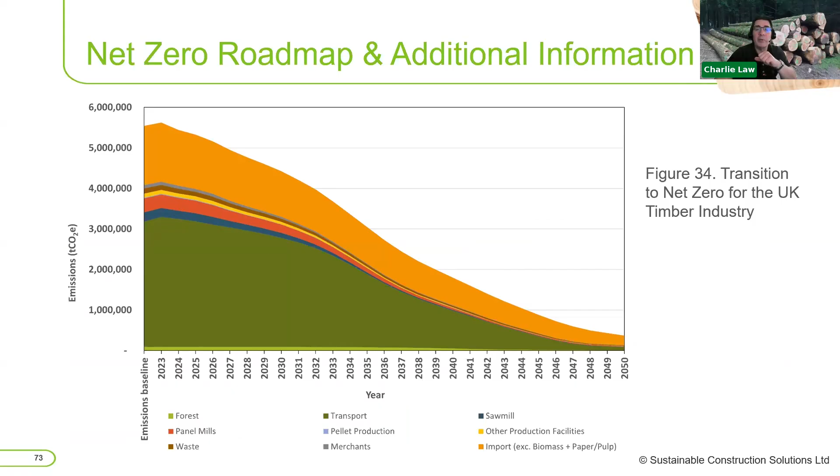This is the trajectory that we're aiming for. So we want to see our transport emissions - that's a key one. This dark green here is the key one we want. Obviously these emissions here are just as important, trying to see how we can reduce our emissions. There's basically a 10-point plan on how the UK timber industry is going to reduce its emissions.

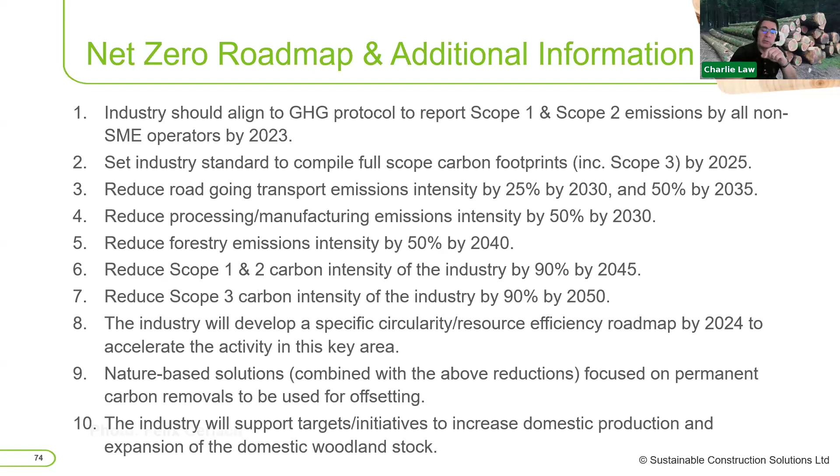And what they've managed to do is over the last few years, since their last EPD which came out in 2017, they've reduced their embodied emissions, excluding biogenic carbon, from 107 kilograms down to around 38 kilograms. That's been achieved through a number of different measures, things like phasing out of those oil and gas-fired kilns that we mentioned earlier on and replacing them with biomass combined heat and power units.

They've also improved their transport efficiency. Some of them are looking at electric trucks to move stuff between plants at the moment, and they're trialing those at the moment. You've got reductions on-site energy use, and also those renewable energy generation.

So in addition to the CHP, some of those factories are using renewable generated power. One of them uses power from a wind farm next door, for example, and heat from another one uses heat from other processes as well. So there's lots of things that they're trying to do to reduce those emissions, and we're obviously seeing some success in that.

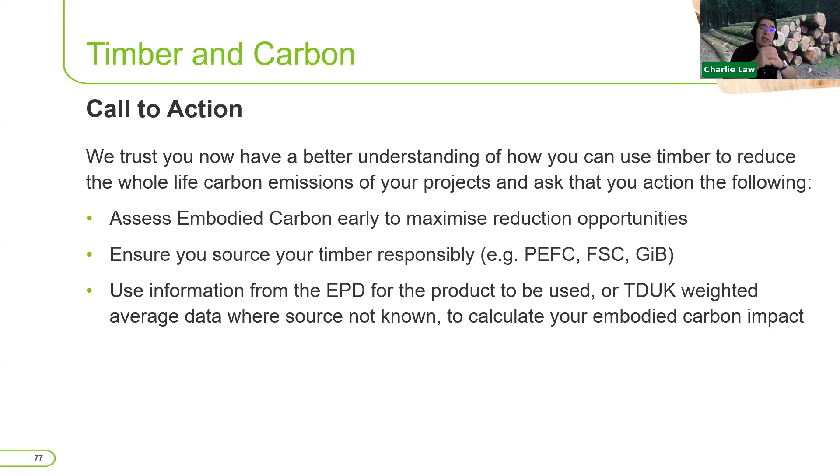Use that information on the EPD for the product to be used, where you know what product you're using, and if you don't and you just know you're going to be using softwood or CLT, then initially you can use those TDUK weighted average data where you don't know that source, and a lot of the tools already have that embedded in. So things like the Future Homes Hub tool, the Fielden Clegg Bradley Studios tool, One Click LCA, all use that TDUK data for timber. So that's already embedded into their tools. If you're using one of them, it will already be in there. But if not, if you're using your own tools, make sure you use that TDUK data.

And then make sure you incorporate those circular economy design principles to reduce your carbon impact. So make sure that's included. That's all from me at the moment.